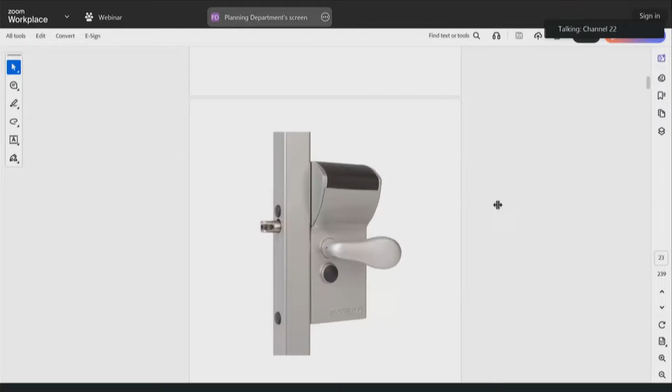Let's now do the rest of the 11 items we still have here. We'll go right back to the top with item number 1, 28 Chestnut Street. This project was here last month, and we wanted some more clarification, and also wanted to see if the location of the Congress Street gate could be moved back to accommodate the mural that is there. So I'll quickly run through the application again.

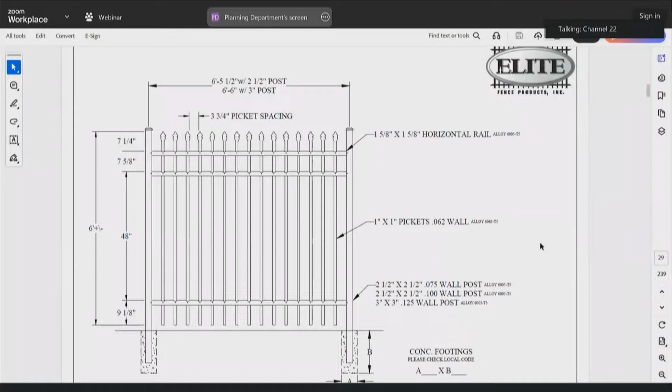The original gate was going to go right across the alley entrance here. The applicant has agreed to move that back several feet, which would allow folks to still enjoy the mural that's there, but would stop them from encroaching too much onto that private property in the rear. They would be proposing this style fencing and gate, and here's another better elevation of that.

And the additional gate for Porter Street, let's see.

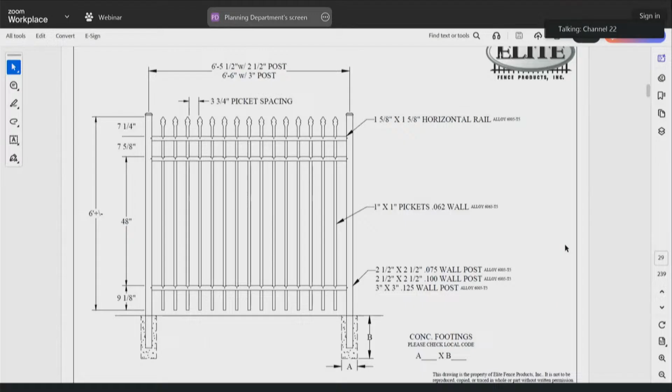Okay, thank you. Sir, if you anchor both of the posts, that means this won't actually operate. The post, then there is a section of fence, then the gate, then a section of fence. That's just an indication of what the fence looks like. Okay, thank you very much.

Any other questions or comments? Just to be clear, this is hollow aluminum pickets. Correct. We did look around the neighborhood and found similar, and that's the closest we could come up with.

Can you tell us, since we don't have a plan or drawing, just so we know and it's recorded, how many feet back from the brick sidewalk it is intended to be installed? Right there is about 5 feet back.

What we would like to do is split the difference. If we move it back any further, then you could use the gate to climb up to the fire escape. We've had quite a few incidents back there because it is so private, and we would like to stop people from climbing up those fire escapes.

So 5 feet is what you're indicating here? Yep. But we're open to whatever we think is best.

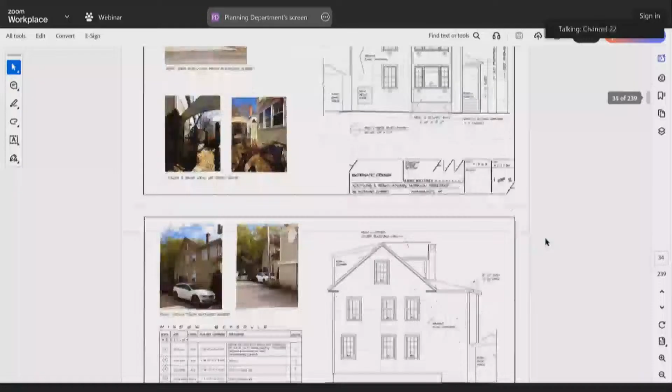And then I just included the original project approval, which has all of the window spec information that they are proposing. Questions, comments?

Okay, that will move us along to item number 3, which is 235 Marcy Street. The applicant here was before us last year and received approval for a sizable renovation project at the property. Originally it was approved that there would be 5 original windows restored on the project, with the remaining windows being replacements. The homeowner has had an inspection done on those 5 windows that were to be repaired. They have found that they have asbestos in them, and so they are hoping that they can instead replace those with the approved windows on the rest of the home.

We do have a statement from a specialist analyzing the conditions of the windows, and their report is there. And then we have a few photos of the existing conditions.

Any questions? I'll just say that I've never heard of asbestos being in windows, not that it couldn't be there, but we also expect for most historic windows being restored that there's going to be lead in them. So either way, the windows would need abatement if being restored.

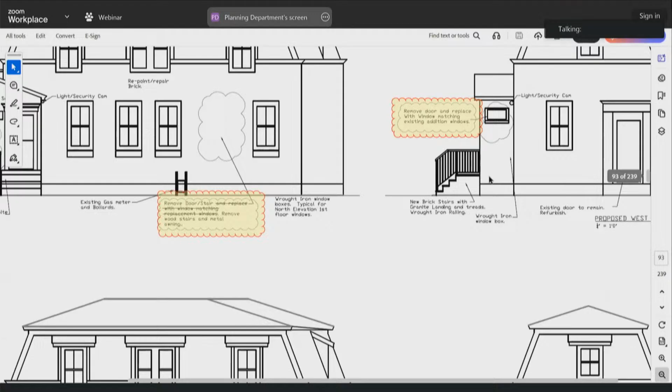We have the original approval here, and then the changes highlighted. I think if you go to the elevation drawings, it's probably the best illustration of this. Are there any questions or concerns about any of these changes?

Great, then we can move on to item number 7, which is 170 and 172 Gates Street. This project was before us either last year or the year before, and they got approval for a garage redevelopment. It turns out the dimensions were just slightly off, so they are coming back with the revised dimensions. Nothing changes about materials, location, anything like that—it's simply to have the correct details on file. This project did have to go to the Board of Adjustment, so unfortunately they do have to go back to the Board of Adjustment. In the event that the BOA denies the minor discrepancy, the original approval, I'm assuming, would then stand.

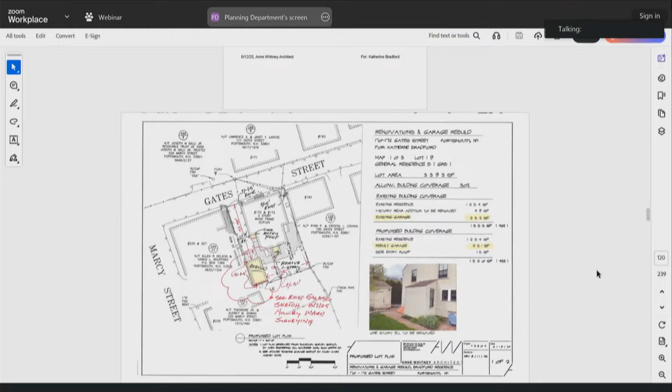This is 251 versus 252 square feet. Oh, that hurts.

Okay, seeing no questions there, why don't we move right along to item number 8, which is 44 Rogers Street. The applicant here has a one-story garage on the property. It's not in the best shape—it's been maybe neglected over the years. So they are hoping to give that some new life by adding a new garage door, a new pedestrian door, one new double hung window, and replacing trim and siding as needed.

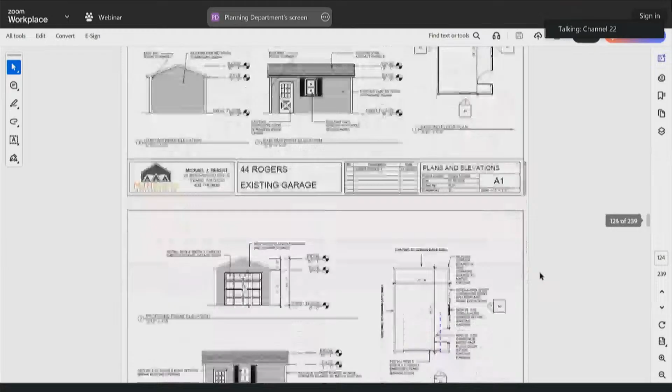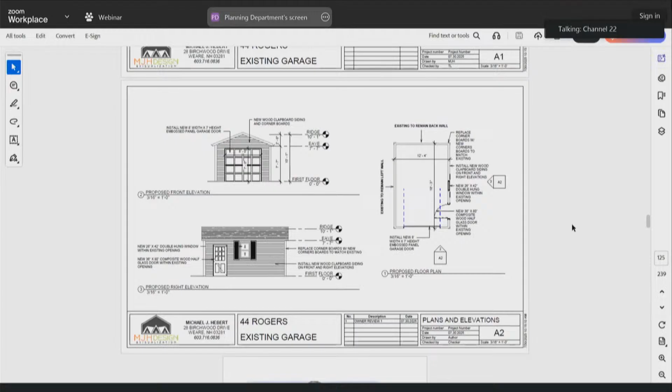Most of the materials are in kind. The garage door is the style shown on the plan as an embossed steel door, and it would be clapboard siding, clapboard wood trim as well. Okay, great, thank you. Any questions? Does embossed mean not wood grain, but like pressed? Yes, exactly.

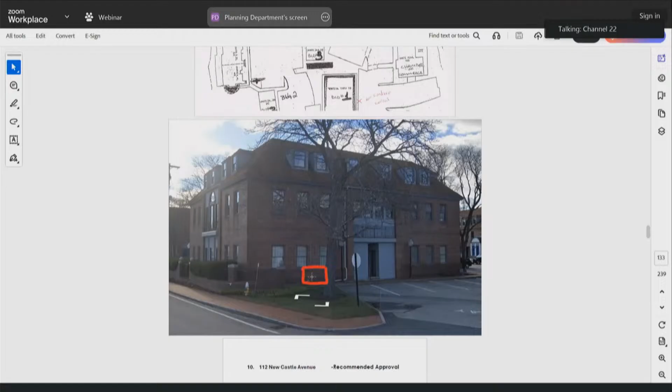Okay, great, so that brings us along to item number 9, which is 500 Market Street. The proposal here is for the installation of a condenser unit, which would be located roughly where the red box is. They are planning to surround that with a wood screening option, as noted further in the application. This is already installed at one of that property's buildings, so it would be matching that one.

Is the applicant here? I do have a question. Do I have someone for 500 Market Street? Checking online.

It doesn't look like we have anyone online. I may be able to answer the question.

My question is, how come this is needed as an installation? Where is the existing condensing unit? I'm not sure they have one; that's just on another building on the property. It's Nobles Island Condo Association, so they're just wanting to replicate that in the building closest to the road. I understand that, but I'm asking why this is needed. It's a new installation that they're putting in for air conditioning. Okay.

There is no sense of any kind of piping. I assume it's just going straight into the building and being distributed there, not a split air kind of approach. Because there's no discussion of it, we can certainly make the stipulation that if there is any ductwork, its design or appearance come back to us. Very good. Otherwise, if it goes straight into the building and you can't see it, then that's fine. Okay, I will just jot that down.

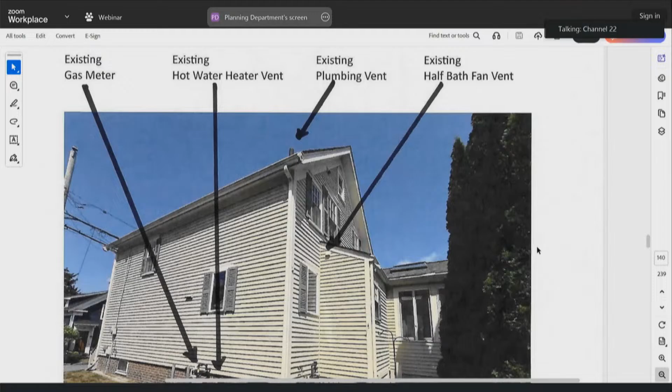And can I comment on the condensers as well? Sure. We will probably be putting mini splits in, but they will all be facing the back or the side where you can't see them from the street. Okay, thank you.

Any other questions or concerns about chimney removal, window removal, anything? I do want to add, of course, that the windows would be infilled and would use in-kind siding to replace. So just to make that note.

Okay, anything else? All right, thank you. Thank you.

No, I was just - I found it interesting that the fireplace chimney in what is clearly an addition was so incredibly heavy. When I looked at this building, it seemed like it was out of proportion to the architecture of the rest of the building, so I have no idea when it was put on. And it seems that it's going to be a little odd to have that center chimney, which would be standard for a building like this, be gone, but have this other chimney there.

And we just approved the removal of a chimney literally on this street just down the way, but it went right through the addition and didn't have another chimney in the building. So I don't know, I found it odd.

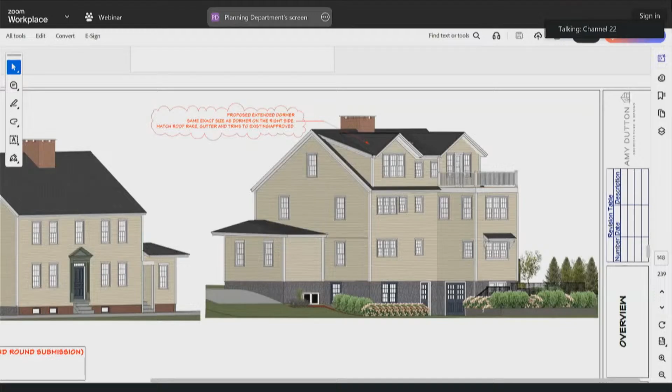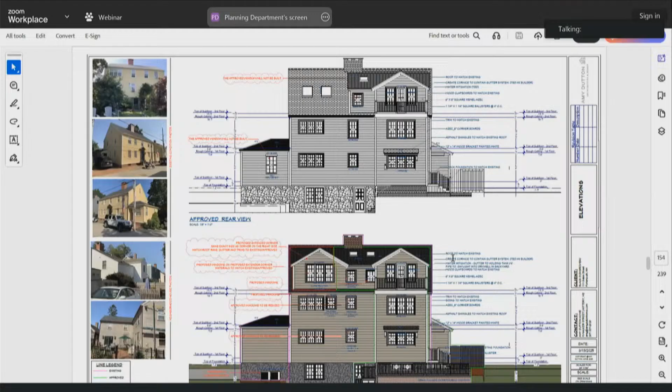Since that reapproval last month, they wanted to come back for a slight change to the rear, to bring the dormer from the right over to the left-hand side on the rear. So we have that particular overview here. This is what was originally approved on top, and this is what they're coming back for, just bringing that over. Any discussion on this one?

All right, everybody's fine with it? Let's move on.

That would bring us to item number 14, 222 Court Street. The applicant here is seeking approval for two different scopes of work. The first is that they have an entrance to the basement that is routinely taking on water, creating problems within the basement itself, and debris can gather in there as well, so they are hoping to get a cover for that, which would deter both of those items.

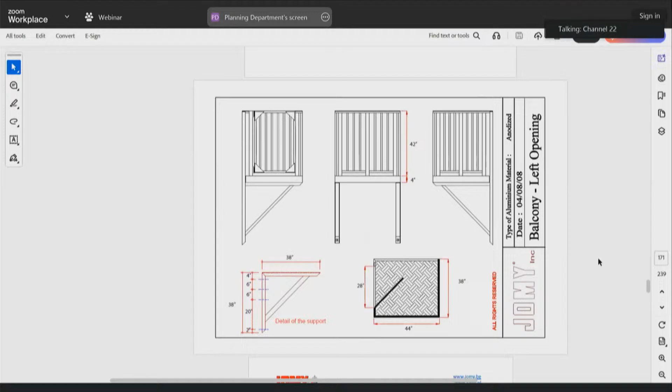The second component is to install a fire escape system from the second floor with a swing-out ladder. The applicant has provided information on the rescue balcony and the ladder system, which is retractable, so it would not be out the whole time. Here is just a diagram of what that balcony would look like. It's fairly simple.

We also have an update for the bulkhead covering, in another document. Just one second. This would be the design for the proposed bulkhead covering, and as you can see, it can open multiple ways to allow access down the stairs, as the staircase is a side entrance.

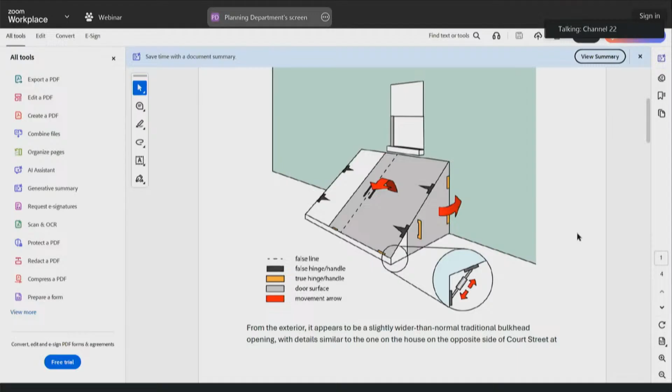Any comments on this one?

I had a question regarding the fire escape, because there's a window on the back side of the building. I used to have a place on State Street with a similar configuration, and we put a fire rope on the back. So I was wondering if that had been considered versus putting a balcony. Is that balcony needed, or could you do something similar? I'm not sure what the precedent is, since I'm still new to this.

Given that, can you introduce yourself? Sure, Barbara Ward, I'm the Senior Grant Writer and Special Projects Associate, which puts me in charge of things like this for the Black Heritage Trail of New Hampshire at 222 Court Street, and I live at 16 Nixon Park in Portsmouth.

I kind of chuckle, because given the age demographics of our staff, it really felt that people just wouldn't be able to step from the window out onto the ladder. One option was to step directly to the ladder, but it was felt that would just be too dangerous. The intent here is both security and fire escape.

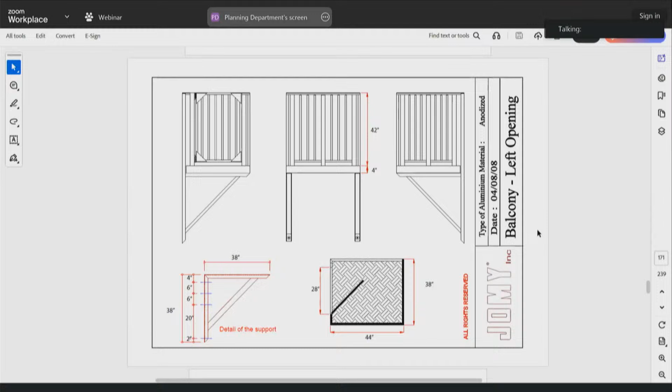I take no objection from a historic standpoint, since it's in the back of the building. But I'd say, hopefully you won't install this thing, because you're putting people more in danger going out on this and climbing down than if you just sheltered in place. The fire department's a few doors over. So hopefully you won't install this, but I won't stand in the way of it being installed.

As for the basement covering, you'll just paint that to blend into the building? In the new basement, can you show the bulkhead? I'm hoping the diagram makes it clear — the slanted side will open to your right, and the other section, made to look like a normal bulkhead, will lift up and be held at a 90-degree angle so you can go down into it. Everything will be painted the same color as the building.

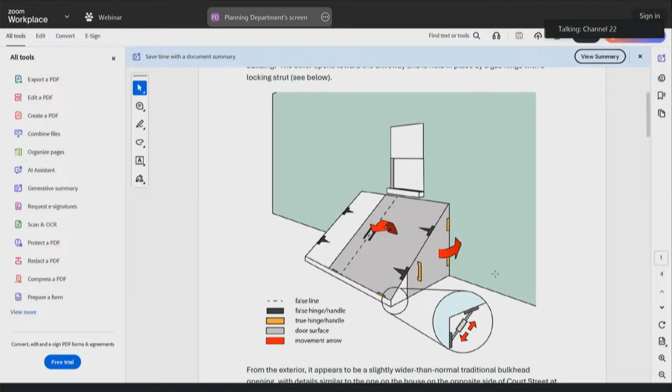And is this a kind of common steel? No, this is going to be wood now — plywood. It's pressure treated, and it's going to look basically like that one across the street. That looks fine, it's just stretched out a little longer.

Great, any other comments on this one? I take some satisfaction in knowing that if this is installed with the collapsible ladder, it could be uninstalled very easily without any permanent damage to the building. All right, any other questions? All right, thank you.

All right, last one — that's the last one. I will try to run through them as quickly and organized as possible. Please help me if I jump off rail. We had a few back and forths.

It looks like in our grouping, the ones we did not already approve start with number 1, 28 Chestnut Street, and it looks like we approved that as presented. Item number 2, 36 Richmond Street, approved as presented with no stipulations. Then we jump down to item number 6, 526 State Street.

Sorry, can I just jump in on 28 Chestnut Street — just that we wanted it... oh yes, sorry, the stipulation is that the gate would be moved back in the alleyway 5 feet minimum. Just want to have that on record.

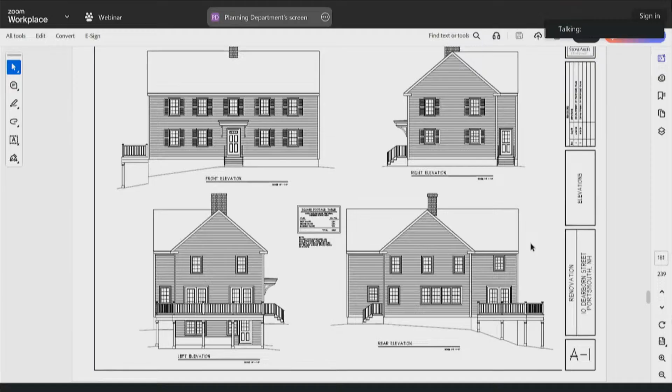So who is here to present this? Please come forward. All right, so please welcome, please introduce yourself.

Sam McCarker, and this is Michael McNeil with Stone Arch Development. Brian O'Neill had an unfortunate situation at UMass Lowell with his son. There was a shooter lockdown, so he couldn't make it this evening. So we're here to answer any questions that the board may have, and just wanted to thank the board for taking the time to review the case.

Wonderful. Are either of you comfortable with presenting the project? Oh, yeah, absolutely. So, number 10, everything's been uploaded to the portal. You could see where the existing structure, I believe is a cape, vinyl sided, built I believe like in the 80s or something.

And what we're proposing is what this board had suggested last time we were here, was raising the roof, turning it into a colonial, and actually restoring it, building it, getting rid of the vinyl siding, the windows, using all historic appropriate materials to make it look like it's been there. So what we submitted, what we would like it to be with the details, is also in your packet.

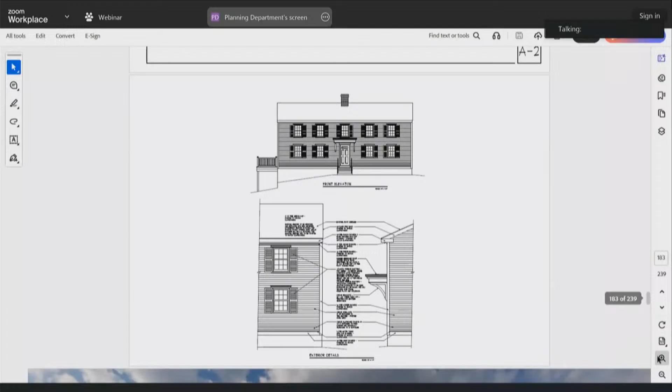I think really that's it, to take the cape and turn it into a colonial, and eliminate the vinyl, using all cedar and appropriate windows. We did add, and also if we missed anything, just let us know.

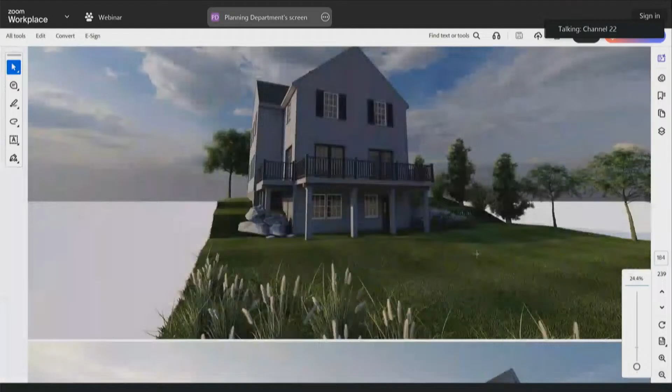We took a lot of notes, but, like the doors, they're sliders. There was a request to make those French doors with the grills. We've done that. We're going to take the posts, wrap those with cedar, give them a little more substance, because you see that not coming into town but leaving, you see that side of it where the deck is. So we'll enhance that. There'll be no shutters there.

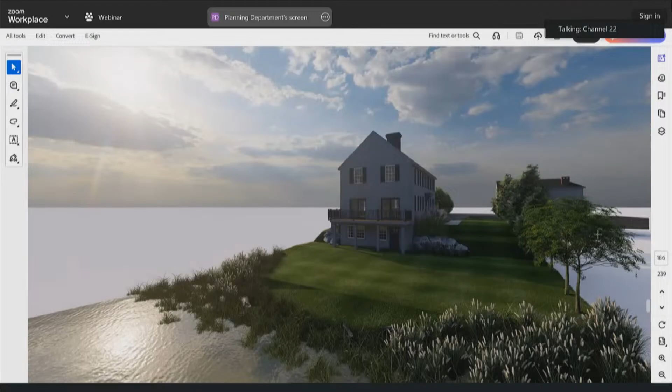We did show shutters on the right elevation of the proposed plan, which is the driveway side, and then also the front elevation, which is really kind of looking at the house. It's sideways, facing like the rear of another home. Okay, and you could see there from the architect what that would look like.

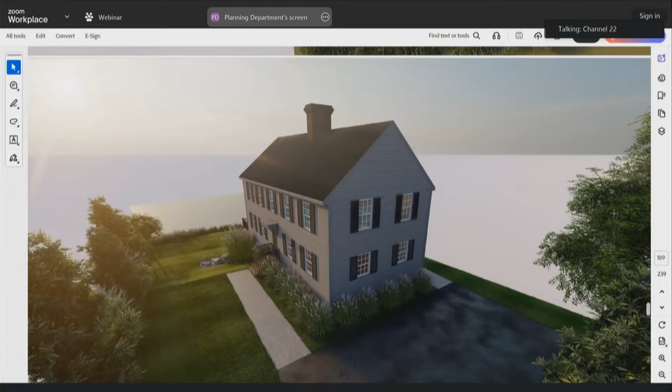Be happy to answer any questions, and Michael's here if there's any technical questions. Are there any questions? I know that they had a work session last week, so anything?

Still very much in favor of the project. From a strictly aesthetic point of view, I have a problem with the underside of the porch, how the pillars just end in the grass. It's not too dissimilar to the way it is today, and it's always looked to me to be very unfinished. I wondered if you had given any consideration to a low retaining wall or little knee walls, something that kind of finishes that back area.

So instead, under the deck, particularly where the deck posts come down—yeah, so aside from beefing them up and making them a little more substantial—it seems odd that you would walk out of the lower level of a house onto the grass. You would have like a little patio. It's a poured concrete patio there now, which has a crack in it, so that's going to need to be repaired. I'm thinking that given how lovely this house is going to be, putting a simple bluestone patio there would be appropriate.

A very low retaining wall, just to finish it off, would make it look like it wasn't just an afterthought—that it really was intended to be a space where people would come out and sit down and enjoy themselves.

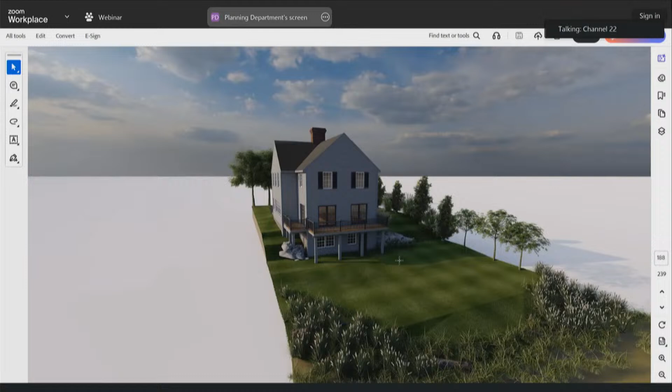I'll just point out that in the rendering, it's missing the bases of the posts. So, in the drawing there is actually a little bit of a base to the post, although it doesn't show what material it's landing in. Those might be the concrete pads that they did.

So basically what I was showing you was footings—taking the existing 6x6 posts, wrapping them in cedar, doing a nice base cap and top cap, and adding some additional bed molding around it, something typical of that time period. It didn't translate well into the renderings, but it is our intent to beef those up and make them more aesthetically pleasing.

So what I'd suggest is that if we approve this, you come back with an admin approval for what that lower patio is going to look like. Because right now in the rendering it looks like grass, and in the architectural drawings it really doesn't call it out. I just question—may not be within your purview—but that is on the water.

So can we rip up that concrete pad and put something down, because you can't even cut a tree that's within a certain number of inches. So we're kind of restricted, and we do want to fix it up because it's just very old concrete that's cracked and should be repaired.

Although that may not be the purview of the Historic District Commission, this property is within our 100-foot wetland buffer, so any disturbance—whether you're taking that out and adding something in—will require Conservation Commission approval. And that would go for any other exterior work that would cause disturbance within this redevelopment.

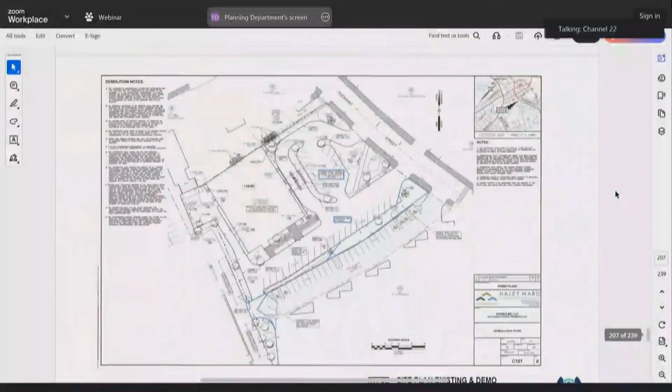As we discussed previously, the basic project is still the same, where it's an addition to the existing building and a renovation of the existing building.

That is what actually literally bridges at the second floor only to connect to the existing building. So the drive-through stays in place where it is. Cars can drive all around and underneath that bridge connection.

One of the struggles that I think everyone was having is that it's an addition to a building which does not fit the district. It's a 1950s mid-century building that was modified in the 80s. Doesn't match anything around it. You have the ultra important Langdon House across the street. So how do you add a Georgian reproduction to a 1950s supermarket?

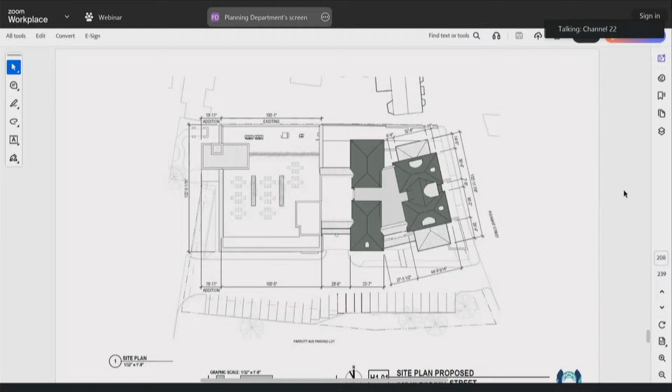So it seemed a more sensitive approach would be to reduce the scale of where they touch with a bridge, and that bridge itself could perhaps be the midway peacemaker between the two fighting styles.

The next few pages are showing the existing building and the work proposed, which is essentially to remove a cladding that was added in the 80s. The original building, you can see the photos in the beginning of the packet, had a light colored stone. The photos are blurry, so I can't see the coursing pattern. But in the 80s, two different claddings were added.

There was a dark gray granite veneer and a brick, like a black and red mottled brick, along with the canopies, the drive-through canopy and the, I guess I'll call it a pergola canopy, along the south and east facades. Those are proposed to be removed, the canopies.

There's also, you can't see this unless you're far away, but I think at one point there was a glass pyramid in the middle over what is now the lobby. At some point it leaked and they covered it with EPDM membrane, so that is proposed to be removed as well. New windows. Right now the second floor has virtually no windows except a couple on the back. We would like to add windows because of course this is going to be co-living on the second floor all around.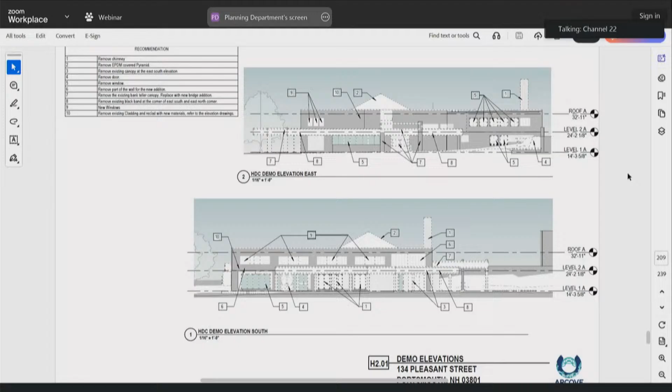The next couple of pages show the proposed addition in scale context with the surrounding streetscapes. These are 2D elevations to show height and massing compared to what's around it. And you can see, at least from these drawings, that we've broken down the massing so that it's lower and narrower in scale, and it respects the rhythms and proportions of the facades in terms of the sizes of the buildings.

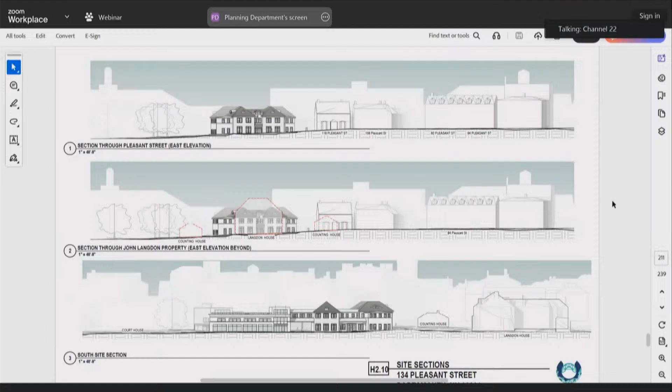We went with the hipped roof instead of, say, a gambrel or a gable. We thought it respected the hipped roof of Langdon across the street, although we're not replicating it. We've turned it a little bit. We do have some rounded dormers at the two front gables. And on the lower drawing, you can see the bridge element which connects to the renovated existing bank building.

Page H211 shows the back, the two what we call back sides. The one is the west site section, sorry about that, that faces the courthouse building, and beyond that is the fire station and, of course, the new housing building. There is a new stair and elevator addition. We did reduce that in size, in footprint. We tightened it up, so it's purely there for function, for fire egress and handicapped accessibility. So we just tightened up any excess space that wasn't really necessary, and we were able to squeeze that down in size a little bit.

The bottom drawing is the side facing north. As I mentioned previously, it's hard to see this from any street because there are houses on Court Street that back right up to it with yards with fences, but that is what's proposed there.

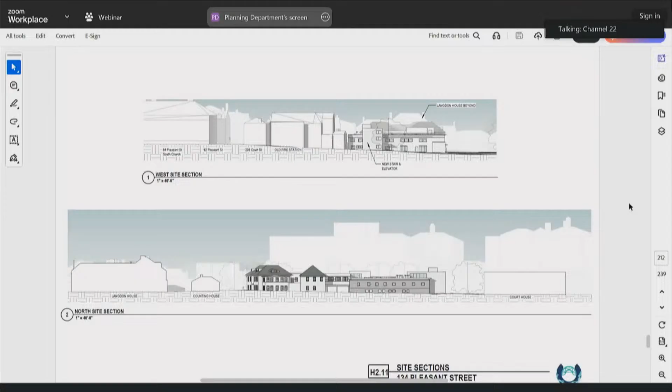The next few pages are larger scale two-dimensional elevations. The top drawing on the left is the renovated 1950s bank building, and to the right are the additions connected by the bridge forms.

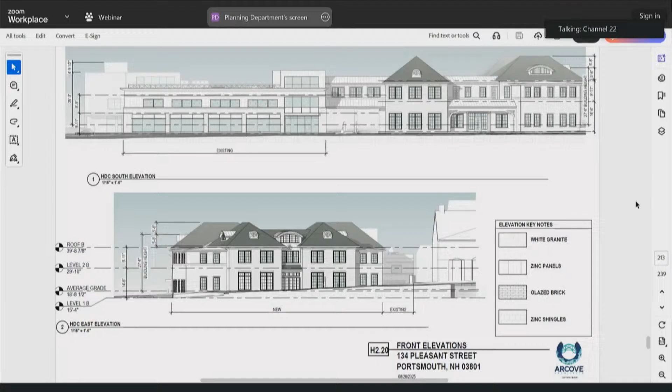And the backs. The next few pages are colored perspective renderings showing this project in context with the neighborhood. This is the 3D city model from the city website, shown from different vantage points.

You can see it—the eave line of the roof is just a little bit lower than what's around it, so it does step down a hill. There's a massive grade change on this property.

So the other big challenge of this is not just matching styles and forms with all the widely varying contexts, but we also have 6 feet of grade change from Pleasant Street to where we're touching against the existing building, and then it continues down another 3 feet beyond that.

One of the things we're still working on is figuring out the grading. We're working with the civil engineers for the site plans at this time, and they are establishing the grade required for the drive-through and the parking, so that we can also get handicapped accessibility into the buildings.

Yet we still want our windows to be above ground for the people inside to be able to see outside, so that's why the windowsills right now are quite low. We'd love to be able to get those a little bit higher, but again, we have to work with the civil engineers to see how high we can get the grade to make sure we're still handicapped accessible.

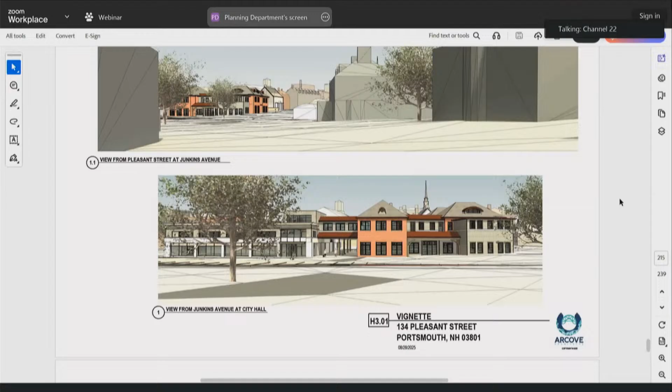So this is a work in progress—there's a ton of detailing that we haven't really begun to even think about. The materials are just some vague notions, but we're looking for your feedback and suggestions. Primarily we're looking at this as a concept of a collection of little hip buildings connected by a bridge structure attached to a renovated 1950s building. So this is our attempt to try to blend it all together in a harmonious way, and we look forward to your comments and questions.

Thank you. Yeah, this is certainly a challenging site and context. So, who would like to chat? That's fine—this is the most sensitive one, so I'm just going to speak to that. Anybody would like to start off? Reactions to this new plan? Yes, Martin?

I appreciate the restart, and I appreciate the new approach. I think while this is safer, it's more appropriate for the surrounding context, and I think this is good architecture and appropriate for the historic district. The only real concern I have at this point in time is that it seems to be like a split personality between the existing bank and the new addition.

I was wondering if it'd be a possibility to have some threads tie through, so there's not just a distinction between the two that is hugely distinct. You've got the modern right next to a more traditional, and it'd be nice if maybe they had some unison. That would be the only criticism I have of this. Because your traditional has got some elements that are very bold, and I wouldn't want you to carry that across to the old bank—that wouldn't seem appropriate. But maybe just a material palette or something that creates some sort of... the word I'm trying to get is unification.

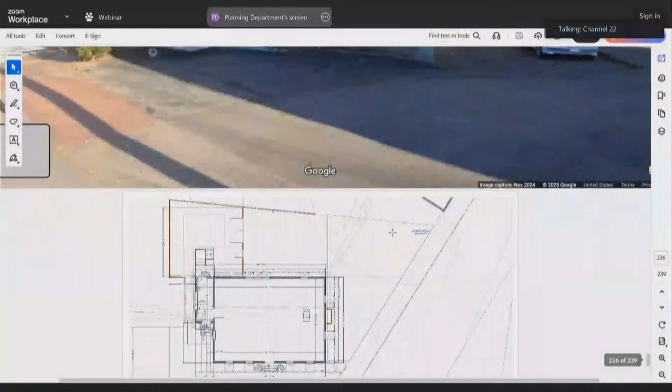The purpose of the back little deck is just so we have an adequate exit, as well as access to the basement, so we can't just have stairs come off and turn. They have to go out a little ways, otherwise we'd block the current access to the basement.

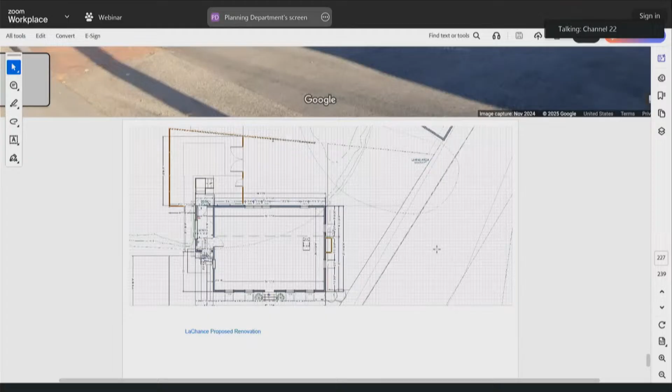One of the pictures in there is from the Athenaeum, showing a deck and entryway actually being on that side of the house. So historically it's kind of correct that something was there, and we want to put something back.

Along with that, we have a flat roof - the house was built in 3 sections. The original house we think is late to mid 1800s. They added a kitchen bump out, then added another bedroom downstairs and a dining room. When they did the kitchen, they put a traditional roof on it. When they did the dining room and additional bedroom, they put a flat roof on it. The flat roof leaks water, as you might imagine. I've resealed it at least twice, always hoping to replace it.

So when we build the addition or entryway, it will have a traditional roof on it. And to line up with the roof on the back side of the house, we'd like to put a traditional sloped roof on the back side, eliminating that flat roof.

There's a window on the back that is non-historical. It was added when the house was renovated in 2013. It's not a traditional window at all, just a typical double pane window. We'd want to replace it with a half-size window, just the upper half, still functioning as an opening, because we need airflow through that window since it's the only window upstairs on the backside.

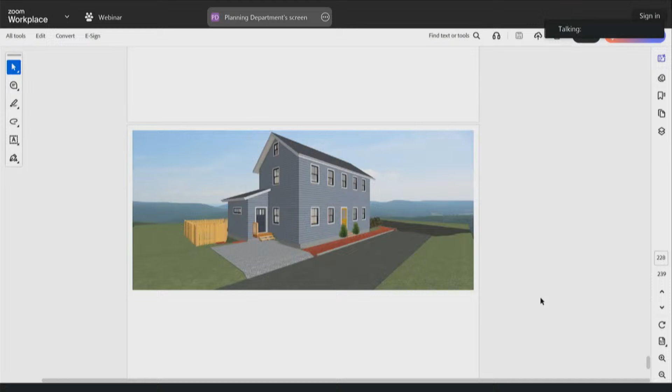The other things we'd like to do are fence and close in the area for the dog, as well as improve security. We have a couple of cameras up and notice we get triggered alerts occasionally - people passing through between our house and the house next to us to get to the apartment complex. There's a park across the street, and they'll park there and walk to the apartment building next to us. We'd just like to improve our security and privacy a bit.

We'd also tear up all of that area that's pavement right now - a good portion of it - and put in some porous material for the patio. We don't have a water problem, but we don't want one, so we're trying to get a little porous material back into that area.

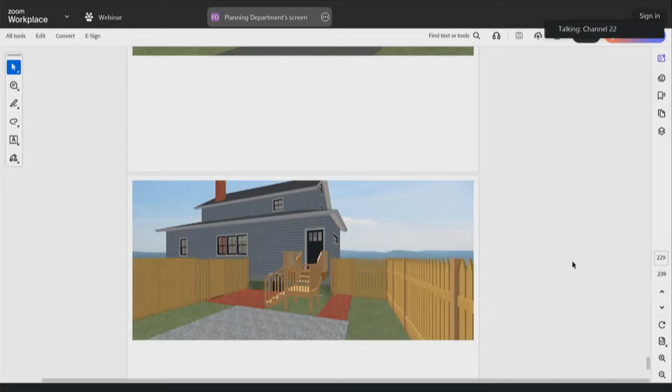Along with that, the other thing would be on the side of the house. We'd like to eliminate the window air conditioning units. They actually go in the front of the house on one window and the side, which is the street-facing side, on the other. We think it would be a big improvement to just put in a condensing unit there. And the reason it's on the side and not the back is primarily because if we put it on the back, we'll have all of this channel work going around to where the actual mini splits would sit. This would have minimal channel work because if we can go through the wall, it goes into a closet, which then could go up to the mini splits and eliminate a lot of channels. So that's the reason for the side.

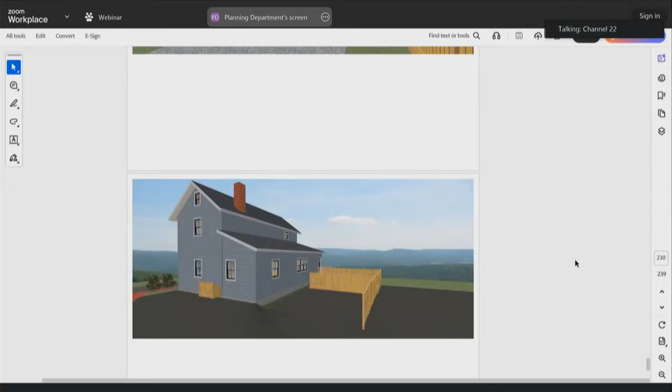Other than that, we want a transom window on the other side of the house where the new entryway is, up high just for light. And that would be a transom window that could open and close, so it would have an outdoor screen on it, but a fixed screen.

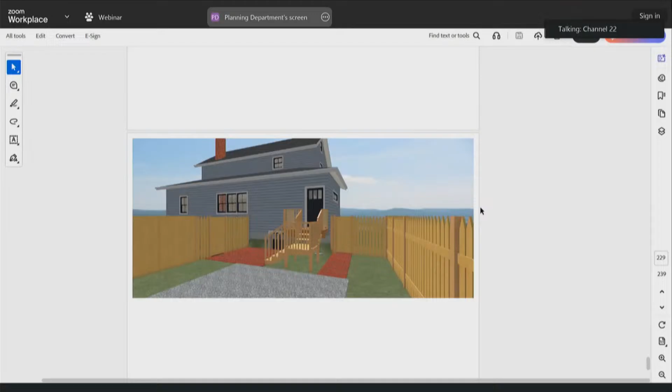And the doors, we'd like to match as closely as possible to the front door, which we think's been there a long time - it's a little leaky, a little drafty, but we love the door, so we don't want to change it. It also provides some visibility, because right now the side door is a solid door - can't see who's outside.

So that's kind of the scale of what we'd like to do, and I'd like to have your thoughts on what you'd like to see as part of the project. Any thoughts?

It seems like a very simple and straightforward project, really, compared to things that we've seen tonight. I think you guys are going about it in a very logical way. Anybody have any comments or suggestions?

Anytime you can get rid of a flat roof - yeah, especially in New England - those roofs, I think that will work out nice.

Yeah, I'm very familiar with this property. I used to live next door in what's the gray apartment now - it used to be green when I lived there. So very familiar, used to look out at that little boat there.

Yeah, the door will go away as well. One of the things that - all my space for storing stuff is going away, so all of my toys have to kind of get condensed.

Did you walk through their property? I did - no, I didn't, I went to the other guys, went to Peter Rice's back there. No, but I mean, you showed the historic photo from the Athenaeum, that there was a little bump out there. So you're keeping it genuine with the history of the house.